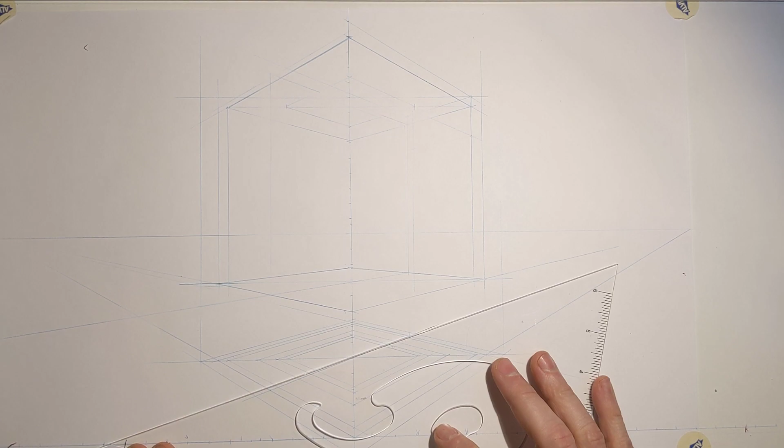All right, so I want to cut right through the center of this thing. So to determine the center, I could measure it, right? I could go over 11 feet, and I could pull that line back, but where it should end up being, if I do that, it should end up going right through the center of that. Well, it's not though, is it? So we have a bit of a perspectival difference going on here, which is okay.

So I'm measuring over. Where's my 11? Come on, half inch. 11 feet. Right there. Oh, no, that does. So yeah, that does what we suspect that it should do, is go right through the center of it. So you could also draw this right through that center, through that X. So this gives us our cut plane.

So I'm going to draw this line up from this point, which is the inside wall plane, right there. Then I'm going to pull that back across, pull that up, and then pull that across again.

And what I've discovered in doing this is that I have an error in my drawings. So you'll see what's happening here. When I do this perspective line, I'm not lining up. So somewhere I made a mistake. So when I did this up to 22 feet, or up to 18 feet.

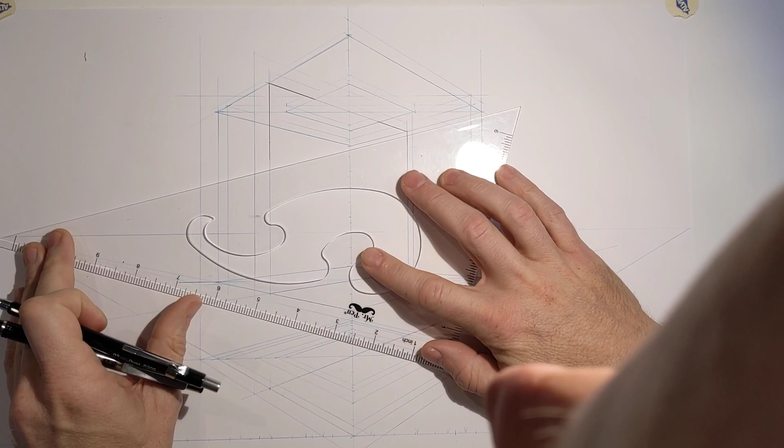to where it intersects with that outside wall line, and that gives me the width of the roof, which looks way too thick. Oh, because I went inside to outside. See? Error compounds. Right there.

Just going to give it a little bit of graphite right there. There. You can see what happened right there. I gotta make sure that's that shadow line that happens. And this comes down some dimension, I'm not sure what yet. So there we have that. We can see this is a little thicker than that. This ended up being 1'6". This is 1 foot. We're drawing that finish in. It might be that roof is a little thicker, but I'm just gonna go with this as I've got it.

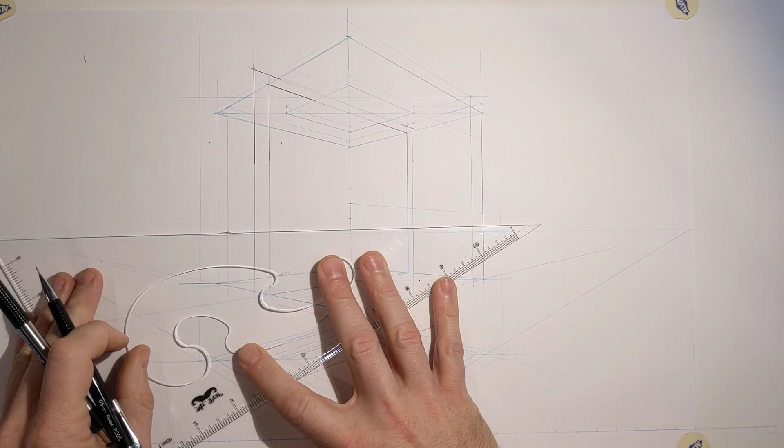The next thing I want to do is lay out the benches so I can finish this cut line, and that comes up 8 feet, right? So we're right here. 1, 2, 3, 4, 5, 6, 7, 8 feet. 8 feet. We're keeping in that plane. Comes back to here. And then project it on back again to get to our cut line. So you see what I'm kind of doing? I'm just sort of swinging these lines around to get them to the cut line. Because then once I'm there, now I know this cut line comes right down to that point.

The next line in is the light cove, which is going to be right here. And that's going to come out like that. And now I don't quite know where this diagonal comes yet, so I have to sort of construct that. So I'm gonna come up, I know this is the base of the bench right here, right? And I know that bench is about 1.5 feet off of the floor. So I can come here, I'm gonna use my 3/8 inch scale to do it right. Here's my floor line. These are my little measurement marks. 1.5 feet.

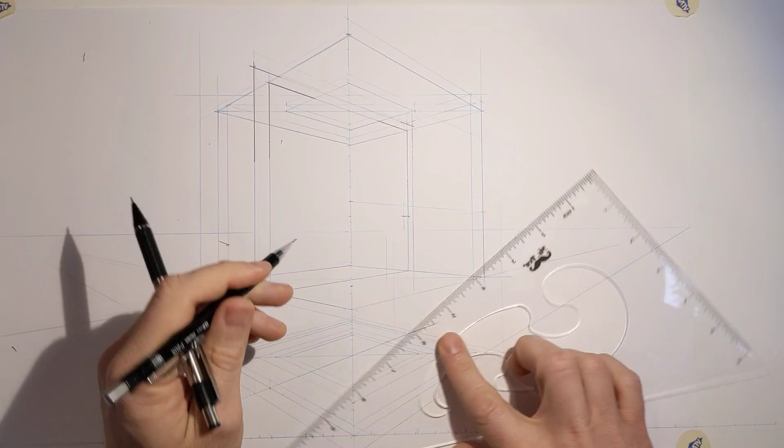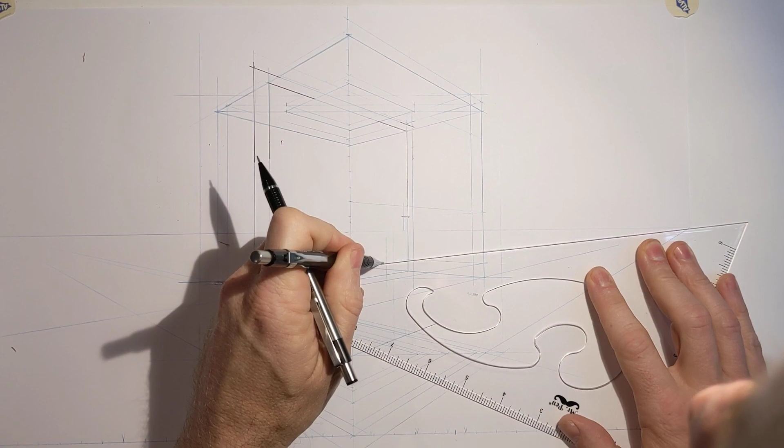And then I'm gonna swing that line back and around. Back over. Get it over to the cut line, which is right there. Swing it on forward. And that gives it to us. So this is, that's the front of the bench. That's the back of the bench. That's the top of the seat. I can start to draw this now. And I'm gonna draw in a little detail as I'm doing this that I'm gonna guess at.

Because it's the width of the pencil, but I'm drawing that little floor drain that's kind of snuck in there. And then this we know goes all the way out. And this line will be just the back of that bench, just that. And now I can connect those two dots. Connect the dots, la la la.

Okay. Pee Wee Herman, anybody?

There's my cut line right there. How about them apples? Okay, now we need to figure out where this top comes in, right? We know that's at 7 feet. So we can come up, again, here we are. 1, 2, 3, 4, 5, 6. Did I do this wrong? I thought that was 8 feet. Oh boy. 1, 2, 3, 4, 5, 6, 7, 8. I did do it wrong.

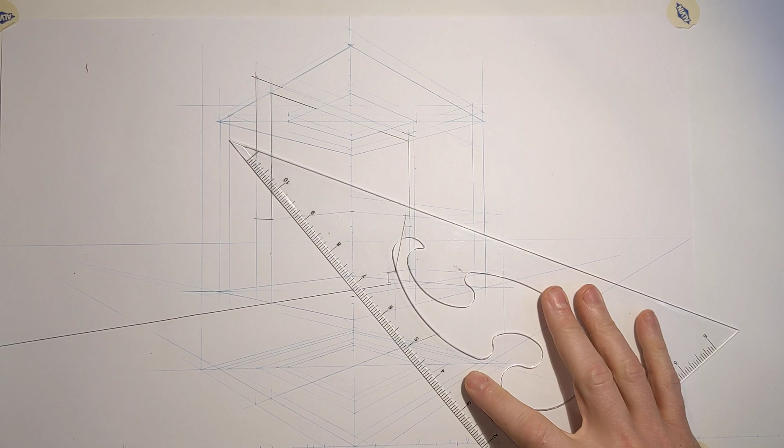And we know, again, from the section that there's a little bit of detail there that this actually comes up, right? So we know this actually comes down about 4 feet to this ground line. It comes up to about 7 feet on that ground line. So again, measuring 1, 2, 3, 4. That's that line. 1, 2, 3, 4. Project it back to there. Back to the cut line.

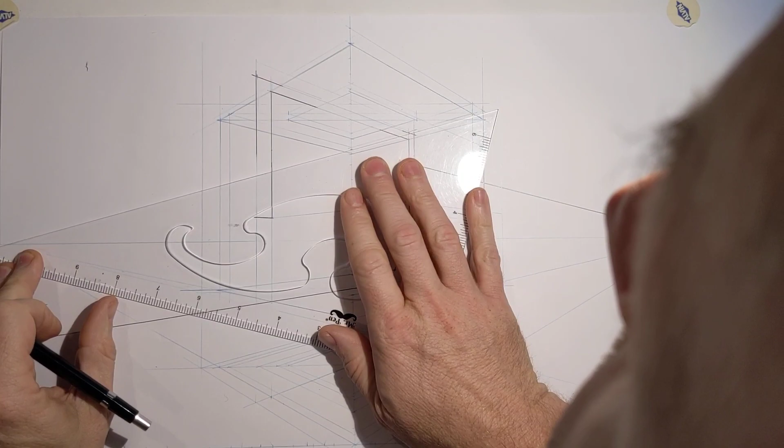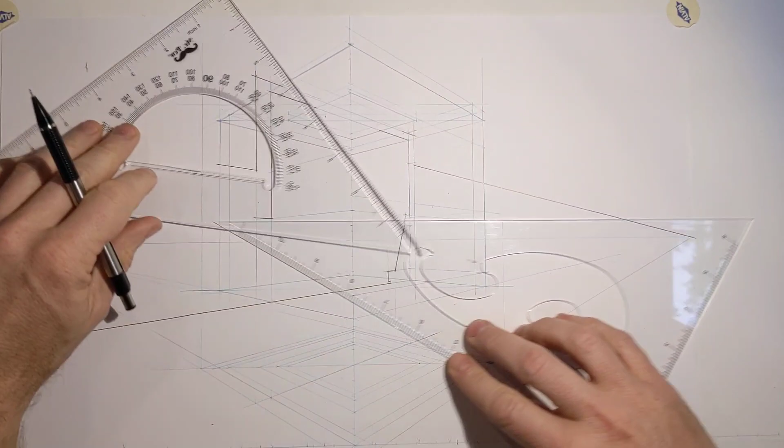And then I can draw all the way in graphite. Oof. Whoosh. Come down 7 feet. 1, 2, 3, 4, 5, 6, 7. It's right there. A little hard to see. Gonna project back to that point. Right? So we're staying in this plane. Then this line is going to come from this vanishing point. Let's see if it works. Yep.

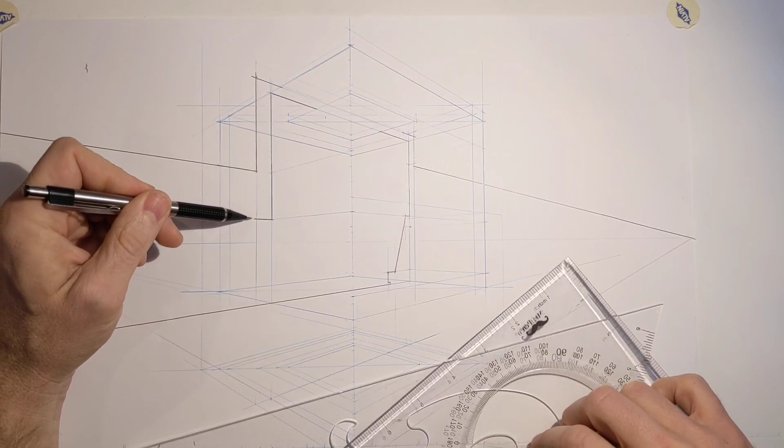That. And then the cut here. So we know this pops up a little bit, right? We have some detail in that section that tells us what's going on there. Comes down to 7 and maybe comes up a couple of inches. I'm going to guess that. I'm not going to measure that. That's a detail that's a little less important right now. But we know that there's just that little bit of a rise. And then I'm probably going to need to do this to get that line, aren't I?

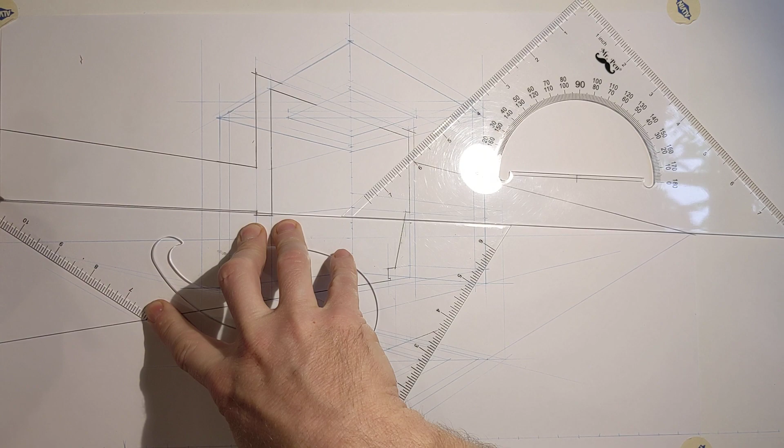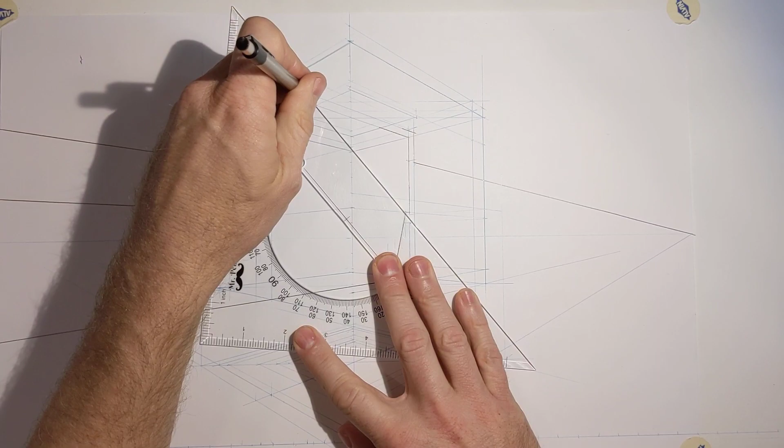So the last thing I got to figure out is how does this come back? And what we know from the section, right, is that this point determines it, right? That determines the sight line. So I can draw that from there to there. But to get it on the other side, I'm going to have to swing that sight line around and make sure I know where that's at. But I can also pull it up from that center line too, right? So that's right here. It's going to be up 8 feet. So that's that 8-foot line is right there.

So I got to pull this back to that point, and then that is going to come out that little bit. So there's no bench over here, right? We're not cutting through it, but I'm still having to get that point figured out so I can figure out that angle back. And then once I have that point right here, I can align it with this point right here. And that's just off of that section.

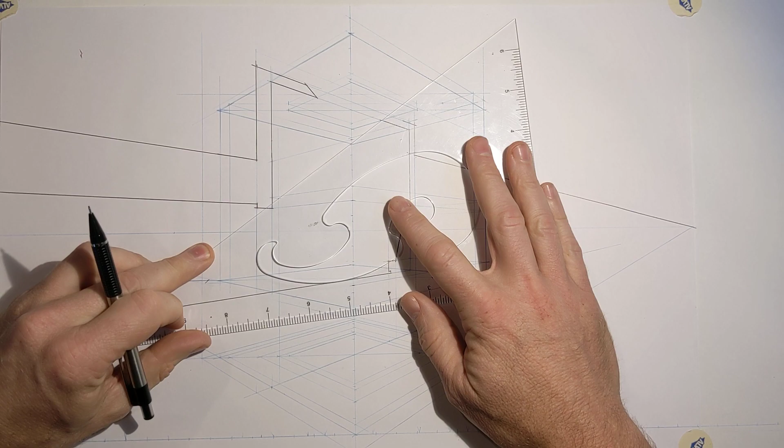You can look at that section in the PDF if you want, again, that shows us how that angle was determined. It was determined by a sight line, and that sight line comes from there. So it actually looks like where we cut this section, we're actually going to end up seeing a little bit of that. And that is our section cut. That is the end of this assignment.